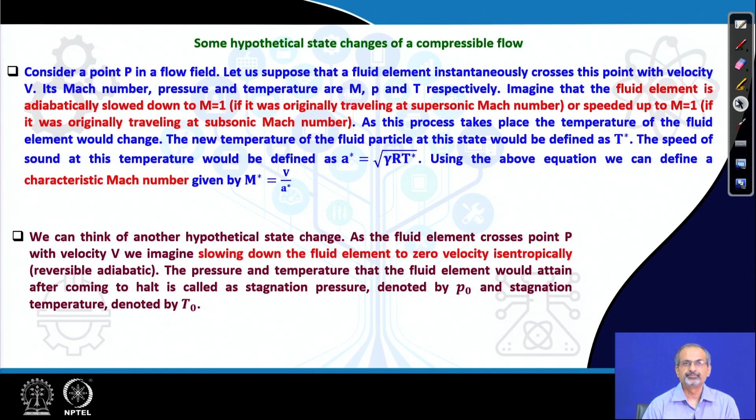Let us recall the energy equation and try to look at it from a calorically perfect point of view. In that case, the energy equation will be written in this way. Remember that this is nothing but H at station 1 and at station 2 respectively, and note that the above form of energy equation is of course valid only for adiabatic flows, otherwise you have to include the heat transfer term. Then we will remove the subscripts for station 1 and imagine that the gas reaches a stagnation condition at station 2.

All right. So, we are talking about slowing down the fluid particle from a state of motion to 0 velocity, and therefore, we will bring in the concept of isentropic slowdown in due course, but not immediately at this point. So, when it slows down to 0 velocity, we have the concept of stagnation temperature coming up. The dynamic part gets absorbed into the static part, and therefore, the static part gets elevated to the stagnation condition.

Now, we need to take note of a very important point here, that when we are defining stagnation temperature T naught, the flow needs to be adiabatically slowed down. It does not necessarily need to be slowed down isentropically. This is a very important point, because the energy equation is based on an adiabatic assumption, nothing more. We are not saying that it has to be necessarily reversibly adiabatic. Therefore, just adiabatic condition is sufficient in order to bring in the concept of T naught.

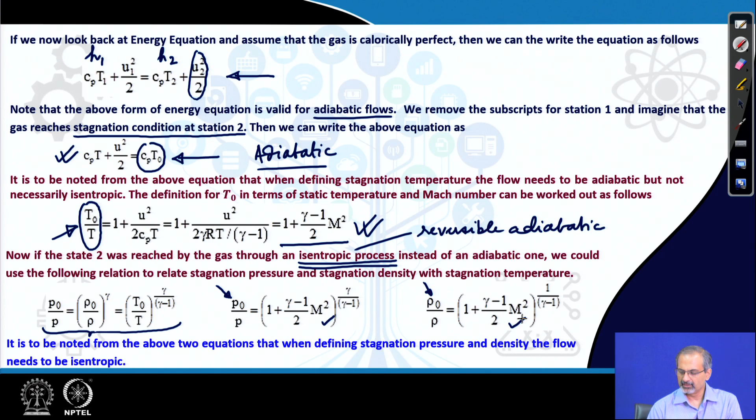Thereby, now you can say that if it is an isentropic deceleration, then the pressure ratio P naught by P will now be a function of M using this equation, or rho naught by rho, which is the stagnation density ratio, will again be a function like this. You need to take note of the differences in the indices here. Okay. So, this is stagnation pressure, this is stagnation density, and now you have a connection between the stagnation pressure ratio and density ratio with Mach number.

Let us look at some more relations related to normal shock. We recall the continuity, momentum and energy equations for the case of a normal shock placed inside a one dimensional control volume that we have already derived. We know what fluxes are balanced across a normal shock, and we had 5 equations to solve and 5 unknowns to be worked out from those equations algebraically.

If you do that, you will be able to come up with the following equations which show you the change in Mach number or density or velocity or pressure, temperature, enthalpy, etc. So, it is only those 5 equations which have to be solved ultimately, but additionally if you bring in the concept of A star, M star in between, the derivations become simpler, and that is why we have already introduced these terms.

So, you can try deriving these equations on your own later on as a homework problem, or try to refer to some of the references which I have already stated in earlier lectures in order to go through the detailed derivations of these equations, which we are stating directly without proof.

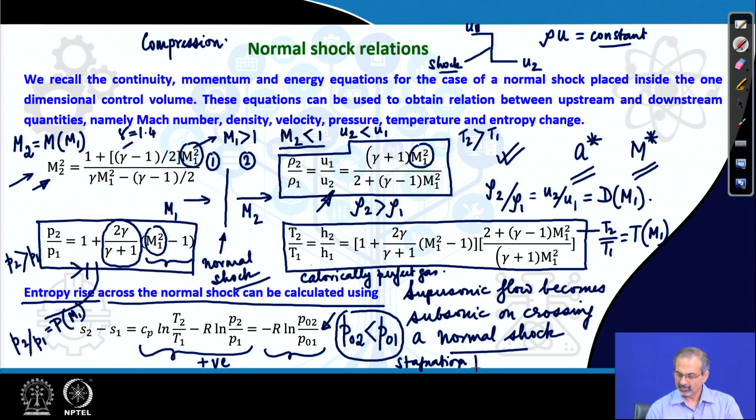We will find that this will turn out to be a positive term. So would this. If this turns out to be a positive term, then that basically means that P naught 2 is less than P naught 1, which means that there is a reduction in the stagnation pressure. Stagnation pressure reduces across a normal shock.

Therefore, the rise in entropy also directly signifies a loss in stagnation pressure, which is a very, very important fact in compressible flows. Wherever there is a normal shock, there is going to be a rise in entropy, and rise in entropy also means that there is going to be a reduction in the stagnation pressure. This is a very, very important issue in jet engines which function at high speed conditions.

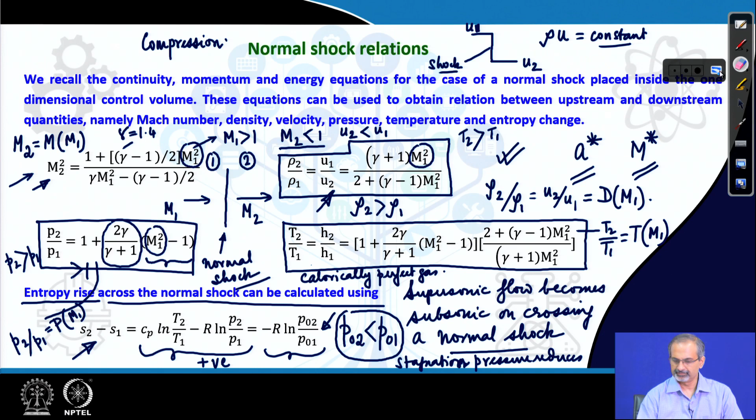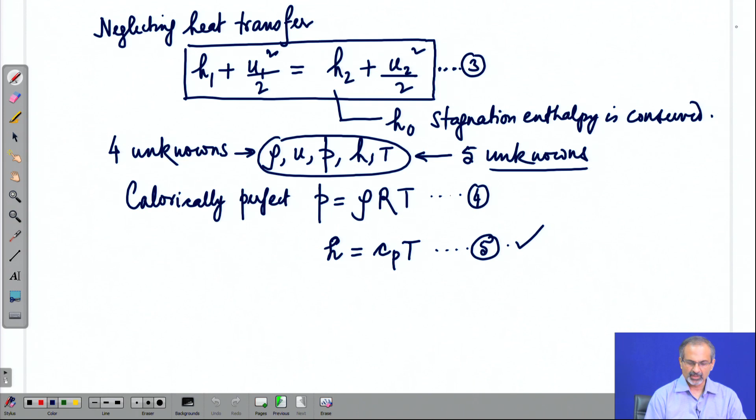So, we had some more on normal shock waves. Let us now get into a discussion on Mach waves. Let us talk about a very, very weak disturbance which is moving through a stagnant medium, a stagnant gas. What could be this weak disturbance? It may be just a beeper, a small source which is creating beeps, that means it is emitting sound waves. It is a really, really small source of disturbance, and let us say it is moving at a velocity v which is less than the sonic velocity.

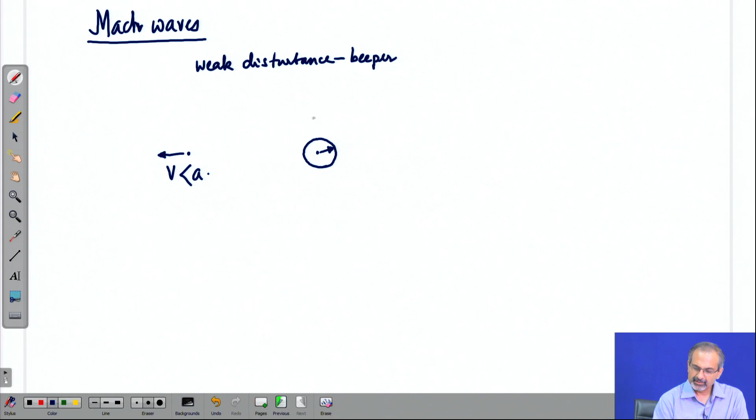What happens is, after a while you will notice that it is emitting the sound which moves around it and forms circles, in the sense that you allow the sound to propagate to the neighborhood and it would propagate out with a velocity of a, and therefore, if you are tracking the sound over a certain time, for different instants of time the sound would have moved different distances.

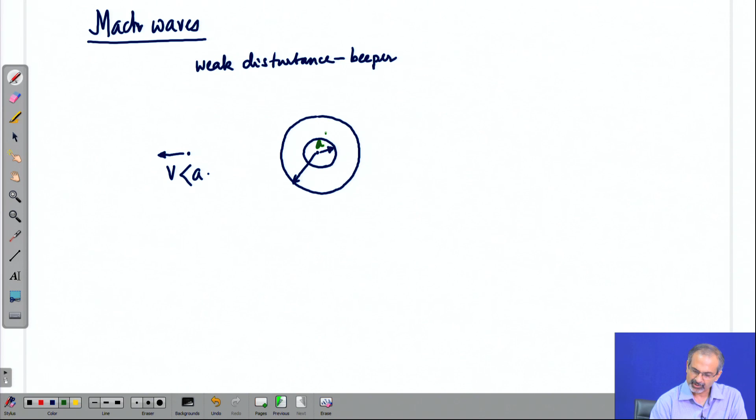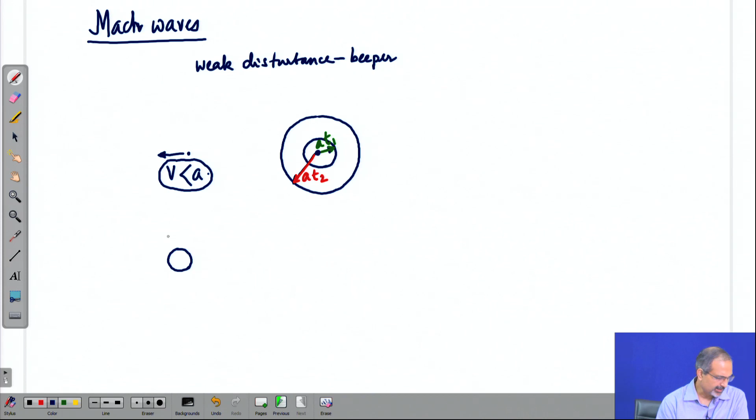Let us try to mark them. So, let us say when you allow the time t 1, it has gone this distance. When you have allowed a time t 2, it has moved out the bigger distance here, and they are forming concentric circles. Here the sound source is static. Now, as we said earlier, you make the sound source move. In that case, you will see that the disturbances are propagating out more like this.

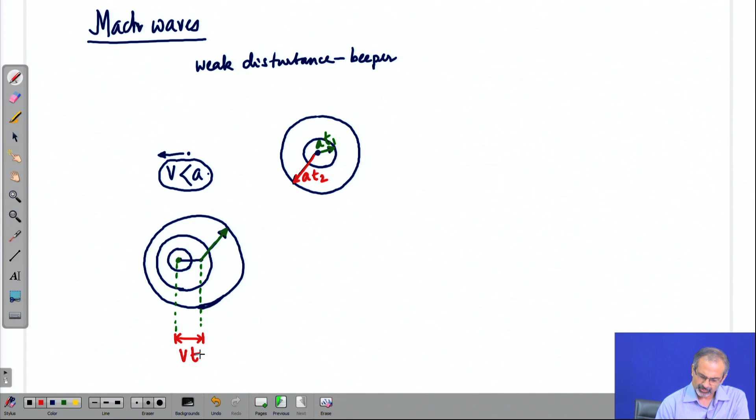Okay. So, what has happened basically is that we have looked at the movement of the sound source over a certain period of time. It initially was here, and after the passage of time it has reached here, and in the meantime the sound waves have reached out far outside. So, the source of the disturbance has moved this distance, let us say v into t, and the sound waves have moved out a distance a into t. So, the disturbance patterns show up like this.

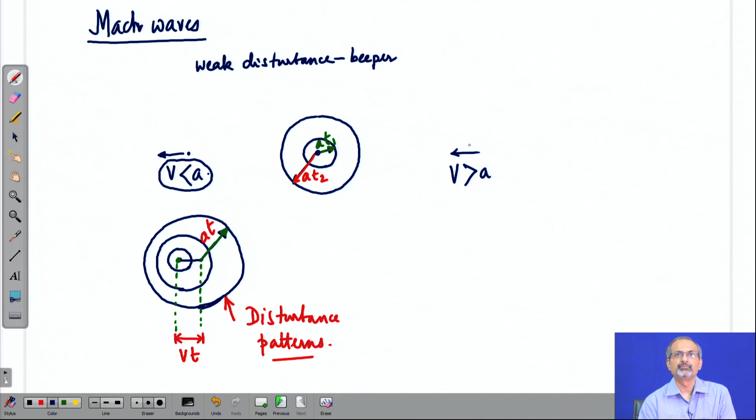What happens if the velocity of the sound source, again we consider that it is moving from the right to the left, you can of course consider it the other way also, there is no harm. In that case, how will it propagate? So, how would the sound waves propagate and how would the source of the disturbance propagate? Let us try to draw them.

Because V is greater than a here, what is happening is the source of the disturbance started moving from here and it reached this point after the passage of time t. In the same time, the sound waves could manage to propagate by a distance of a t, which formed this circle. But you can see that the disturbance source has gone far beyond that circle. In the earlier case, the disturbance source was enveloped within the circles, but this time it has moved far ahead.

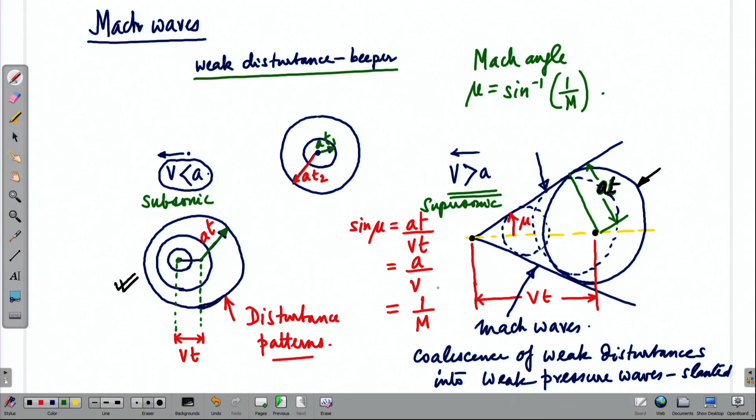So, this is how weak disturbances propagate into a medium when the source of the disturbance is moving at subsonic speeds and moving at supersonic speeds. The Mach waves form only when the disturbance source is propagating at supersonic conditions. Remember that it is a very weak disturbance source. What happens if it becomes a source of strong disturbance?

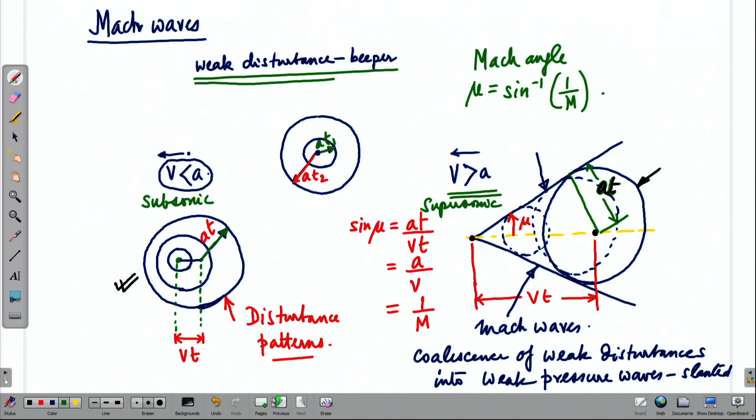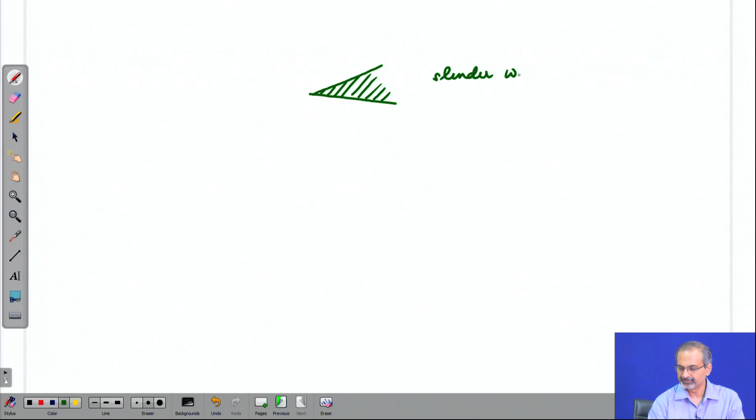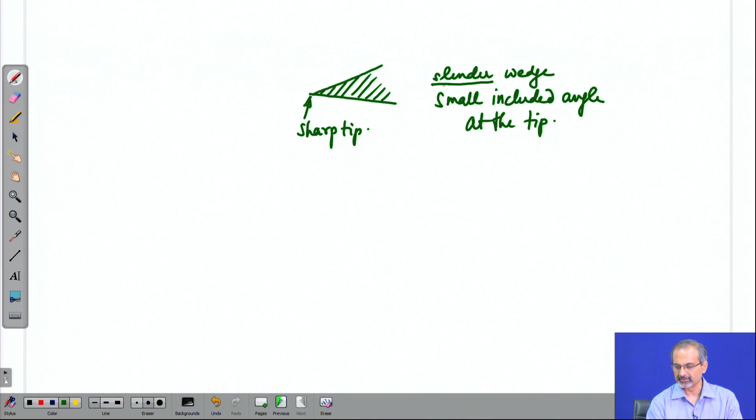In that case, let us say you look at a shape like this, which we say a slender wedge. Notice that it has a sharp tip and it also has a small included angle at the tip, which makes it slender, that means thin, narrow. And you could have two situations.

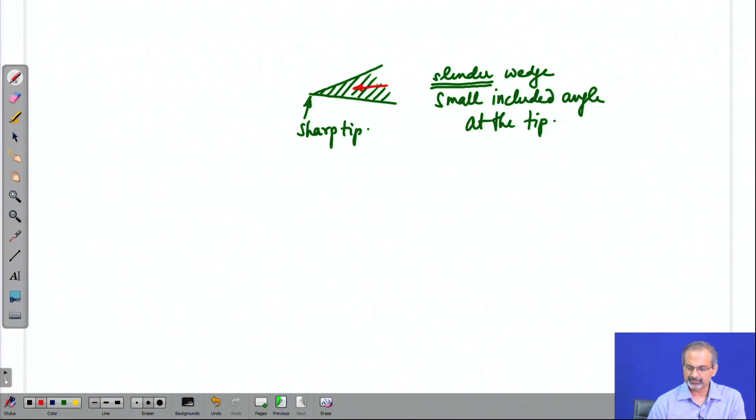One is that this body is moving into a quiescent medium, that means the air is stagnant, but the body is moving towards the left, and thereby there is a relative flow which the body sees as if it is approaching from the left to the right. The body moves from the right to the left, but the flow appears to be coming from left to the right, and let us say the flow is supersonic.

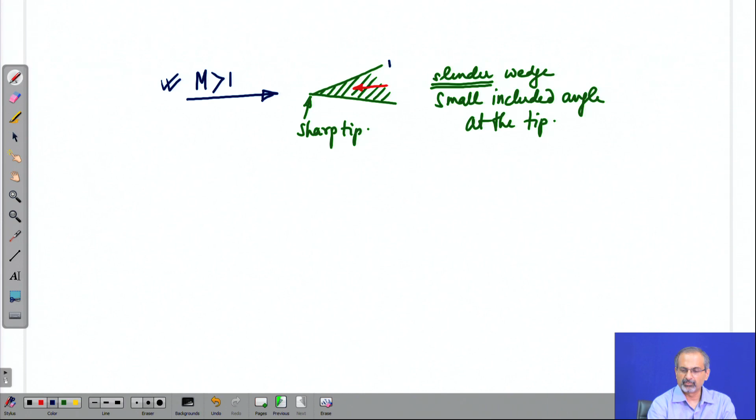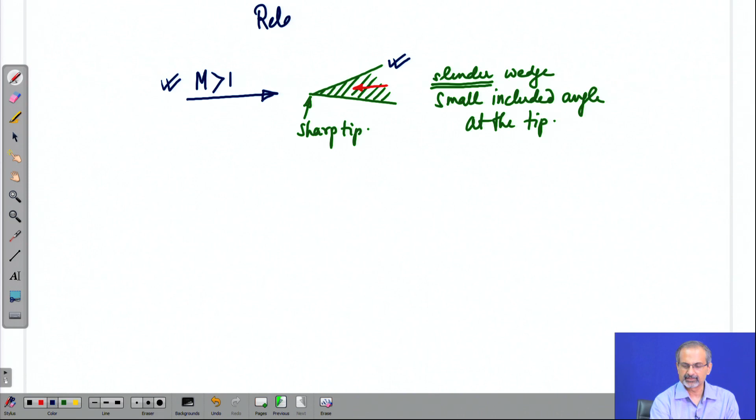So, what did we say? We said that the two situations are equivalent. One is that the air is stagnant and the body moves from right to left. In that case, if you are riding on the body, you will see the flow approaching at supersonic conditions from the left to the right, like we have indicated here. That is one situation. The other situation is you keep the body fixed and you create a supersonic flow over the body which moves from the left to the right. So, both the situations will create this identical relative velocity, and that is all that we are interested with.

In fact, this concept of keeping the body fixed and creating a flow over it is what is used in the wind tunnel situation. While in real flight, it is the other way around, that the body is moving while the air around it is either stagnant or moving with very small velocity compared to the velocity of the body.

Having said that, once the supersonic flow reaches this body, this is a much larger source of disturbance or perturbation compared to the beeper that we saw in the case of Mach waves. What happens?

The collision of the molecules on the body as the flow approaches the body again create ripples of disturbances propagating away from the body surface, but they cannot move far upstream because they are traveling at sonic speed. The disturbances are traveling at sonic speed through the collisions of the molecules. Therefore, they do not make their way far upstream, they accumulate somewhere, and that accumulation leads to formation of an attached oblique shock.

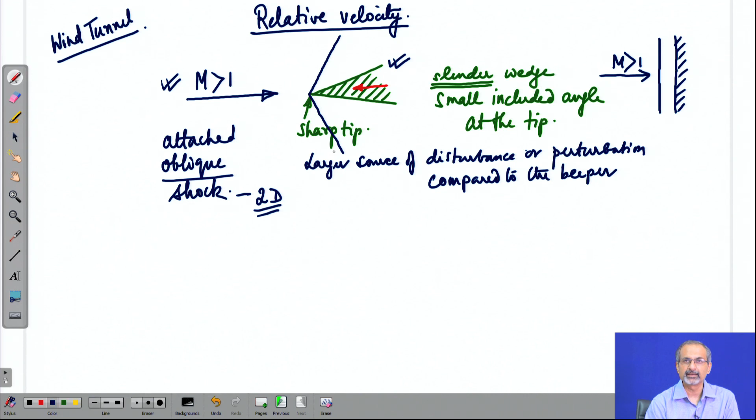Remember that it is not a normal shock, because the obstruction is not flat and normal to the approaching flow. If it was normal to the approaching flow, you would have actually seen formation of a normal shock. But because the obstruction is tilted at an angle to the approaching flow, which is not 90 degrees, the shock also gets tilted, and that is why it is called an oblique shock. Remember that this leads to a two-dimensional flow across the shock, no longer a one-dimensional flow. Moreover, for the same upstream Mach number, this is weaker than the corresponding normal shock.

We mark this angle as theta and the other angle as beta. What do they mean? Theta is half wedge angle. It is half the complete wedge angle, which is 2 theta basically. What is beta? Beta is the oblique shock wave angle, often just referred as wave angle. The half wedge angle is also called as turning angle.

When we look at inviscid flows, there is no viscous effect near the wall. We are talking about flow slipping over the wall, and then we can imagine that the same wedge which was there in the middle of the flow is kind of embedded here as a part of a tilted wall. And when a supersonic flow approaches this so-called compression corner, the effect is going to be identical to what you saw in the case of the wedge.

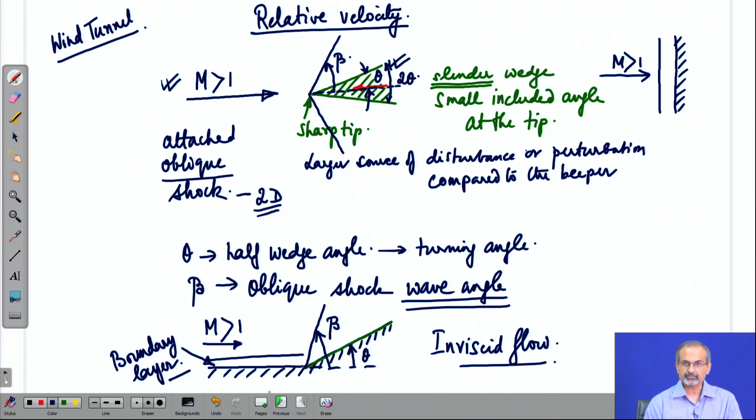And when the shock interacts with the boundary layer, there is a complex flow pattern produced, which we will discuss later. Let us try to sketch the oblique shock and try to understand what happens to the flow as it crosses the oblique shock.

Let us say it is approaching from the left with a velocity of V1 with a Mach number M1, and once it crosses the oblique shock, it is travelling with velocity V2, say Mach number M2, and by the geometric aspects of the problem that we have defined, this is theta, this is beta.

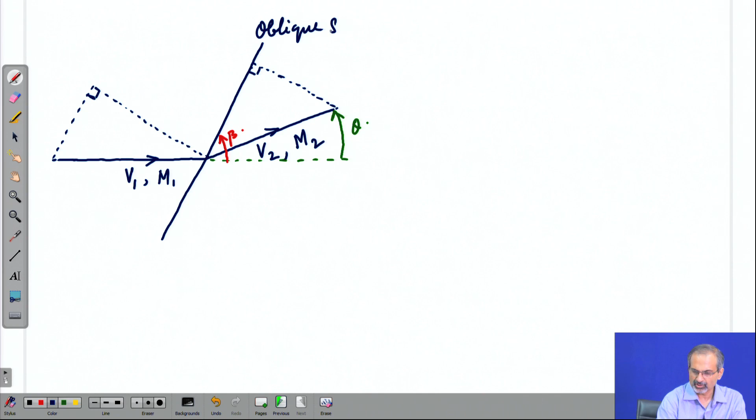What we do is we resolve the velocities upstream and downstream of the shock into components. How do we decompose them into the components? You have to watch carefully. We are decomposing them into components which are normal and tangential to the oblique shock. So, this is your oblique shock, and you have decomposed V1 and V2 into normal and tangential components.

We will name them as, let us say, U1 and W1. So, this is what? This is the normal component, this is the tangential component, because these are parallel. Okay. And you can similarly define the Mach number corresponding to these velocity components. So, normal Mach number, tangential Mach number, and so on. Similar things are done downstream. So, you have a U2, Mn2, and here you will have a W2 and Mt2.

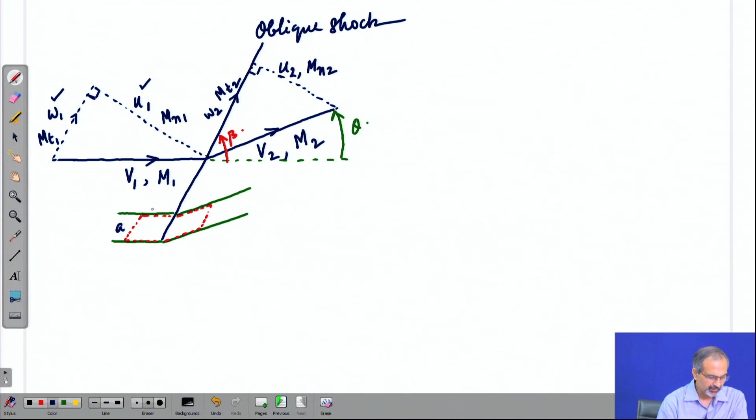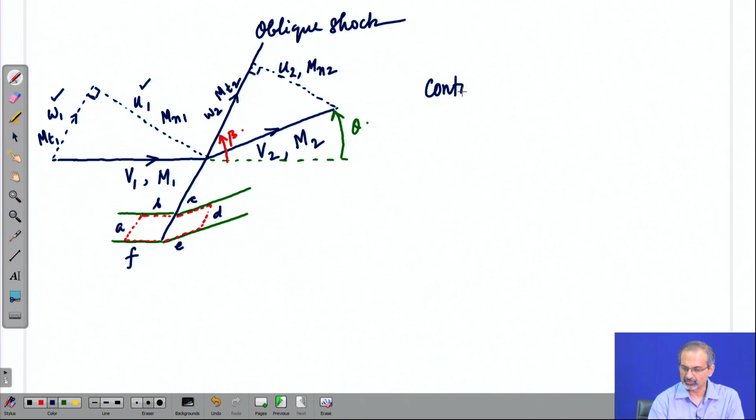Now, the idea would be that you create a control volume by following two streamlines. So, you follow two streamlines and form a control volume, by including the shock inside. Let us name the faces of the control volume. All right, and then we try to figure out what happens to the conservation equations when we apply it to the control volume. Obviously, we have to use it in the integral form, because we are defining a finite control volume over which we have to apply the conservations.

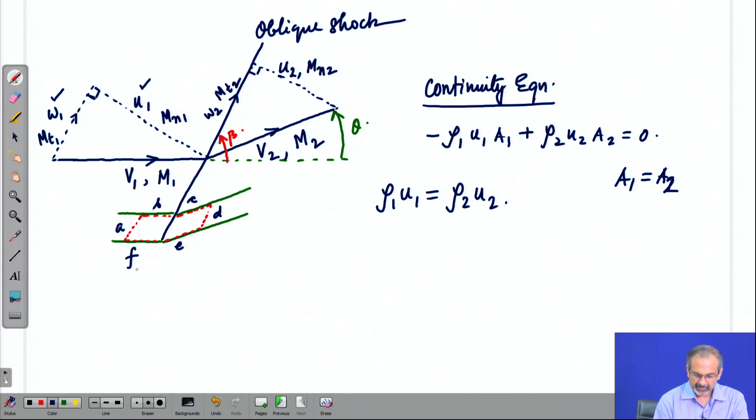You will find that once you apply the continuity equation, the equation turns out to be like this. And from the geometry, you can easily figure out that A1 is equal to A2, and therefore, you basically get back the continuity equation that you got for a normal shock. So, what have you done? You have applied the continuity equation in steady form for that particular control volume, and I am leaving it as a homework problem for you to figure out how that worked.

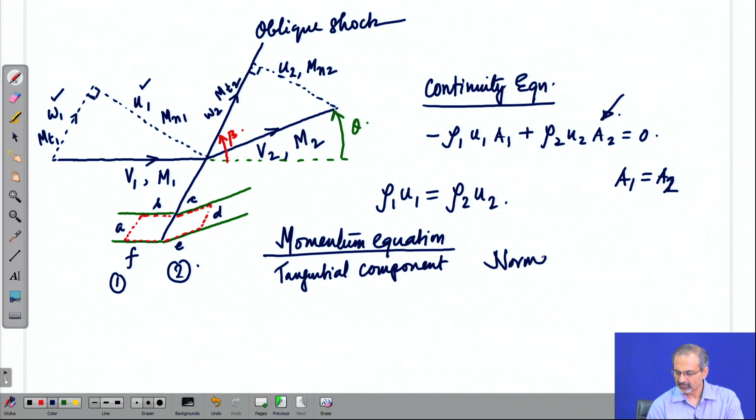When it goes to momentum equation, you actually have to look at the tangential component and the normal component separately. You will not be able to get all of it in one go. It is similar to using x, y, z separate components of momentum equation, which we have seen earlier. You would be able to show that W1 is equal to W2. That means, the tangential component of the velocity remains unaltered. And what does the normal component say? It gives you an outcome identical to normal shock. That means, P plus rho u square remains conserved.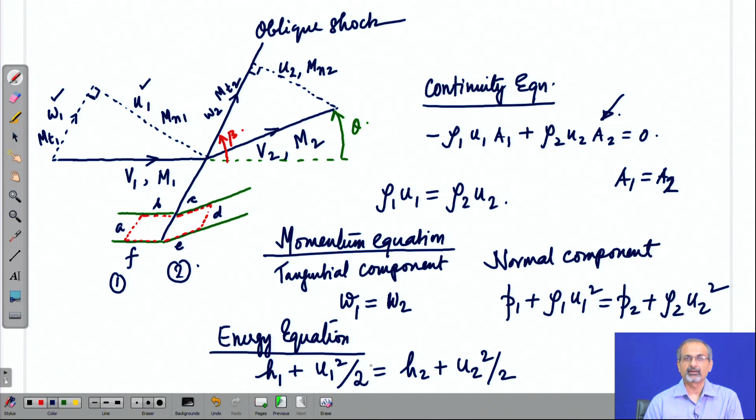When you apply energy equation, what do you get? You would get the same outcome that you got for normal shock. So, there are a lot of similarities that you are seeing in the case of oblique shock, but there are also differences which we will see in the later lecture.

So, this is what is applicable for a normal shock. Try to explore whether this will also work for oblique shock or not.

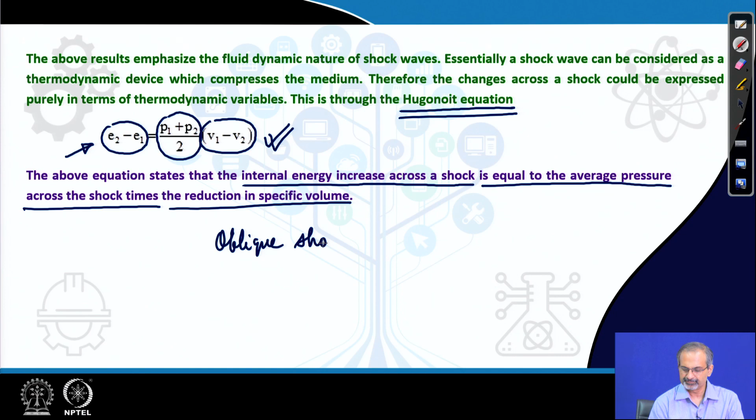So, what did we study in this lecture? We discussed more about hypothetical state changes of a compressible medium. So, there is a spelling mistake, let me rectify that. We discussed about changes across a normal shock. Further, we discussed about formation of Mach waves, which are weak oblique pressure waves, and we also started discussing oblique shocks, which are formed when oblique pressure waves become strong. Thank you.